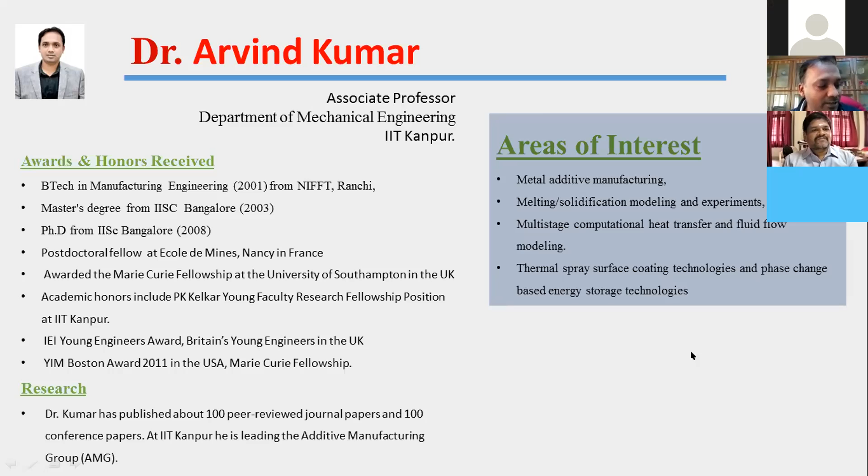So in this talk, I will look at how this 3D printing and additive manufacturing technology can enable IoT-based manufacturing. My current talk is actually based on this.

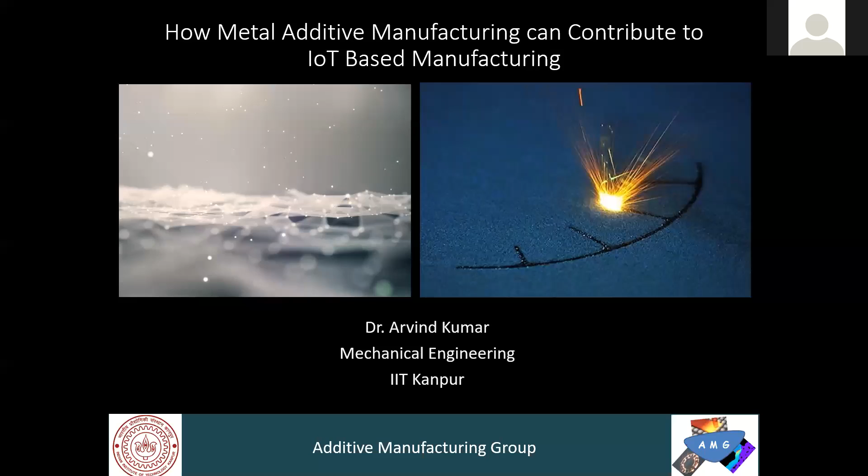So the content of today's talk, I would very briefly browse through some topics like Internet of Things, Industry 4.0, additive manufacturing, and then the major portion of the talk will cover how additive manufacturing can contribute to Industry 4.0 and IoT-based manufacturing.

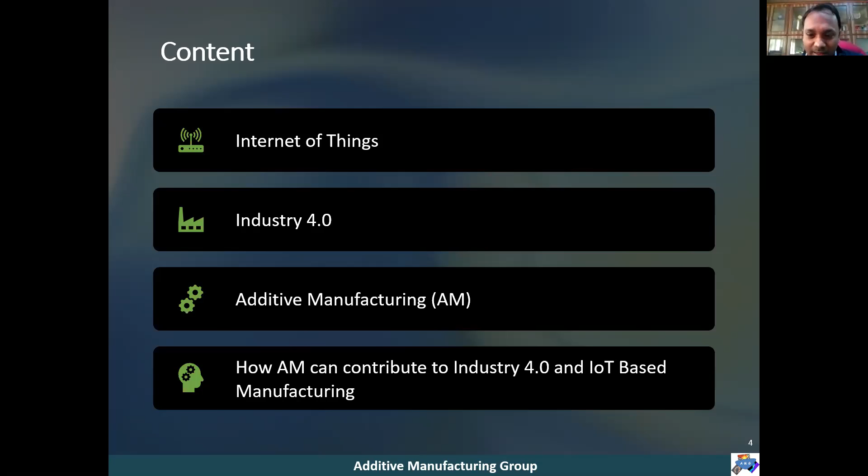I'm sure you will keep hearing the initial description throughout this course, so to tune in to the actual topic, I will also introduce you to the initial topics, but very briefly. So, Internet of Things, right?

A very classical example: these days many of us use something like Alexa or Google Assistant at home to command our virtual personal assistant to operate some jobs. Like, say, we have Alexa at home, and if our electrical switches and appliances are smartly networked, we can instruct Alexa, for example, to dim the dining room lights. After hearing that, Alexa will assist us by actually performing this job. Same way we can ask for different things: turning on the light, locking the door, switching appliances on or off, playing music, and even answering some basic questions, right?

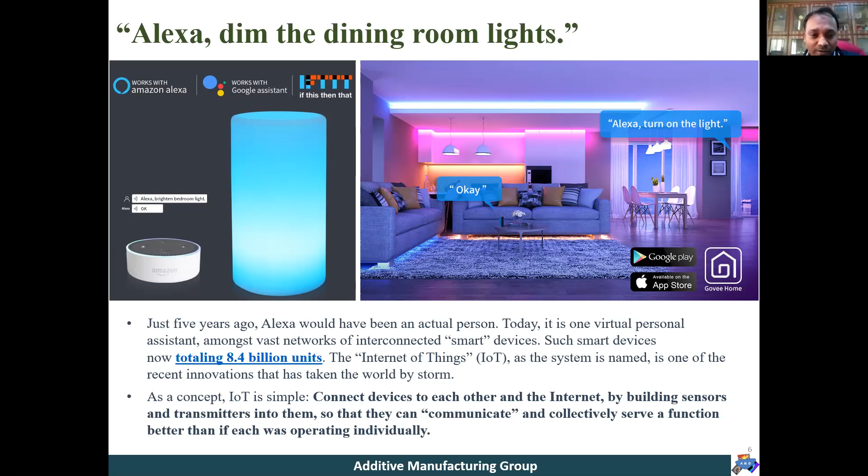Such smart devices are now in the billions in number throughout the world. The Internet of Things, called IoT, is one of the recent innovations that has taken the world by storm. How it is defined as a concept, IoT is very simple: basically, we connect devices to each other and the internet by building sensors and transmitters into them, so that they can communicate and collectively serve a function better than if each was operating individually. So this is the basic definition.

Now this is some interesting data we have, like say Internet of People, this is data from 2010. You can see various people connected through internet. We have world population of, say, 6.8 billion at that time, and the total number of connected devices were about 12 billion. It is approximately 1.8 times the world population.

Now by the year 2020, if we talk about Internet of Things, here you can see we have people connected to internet, then things connected to internet, and then things connected to things. So by now we have a population of say 7.6 billion, and now the total number of connected things, constituting all these three aspects, we have 212 billion, about 30 times the world population.

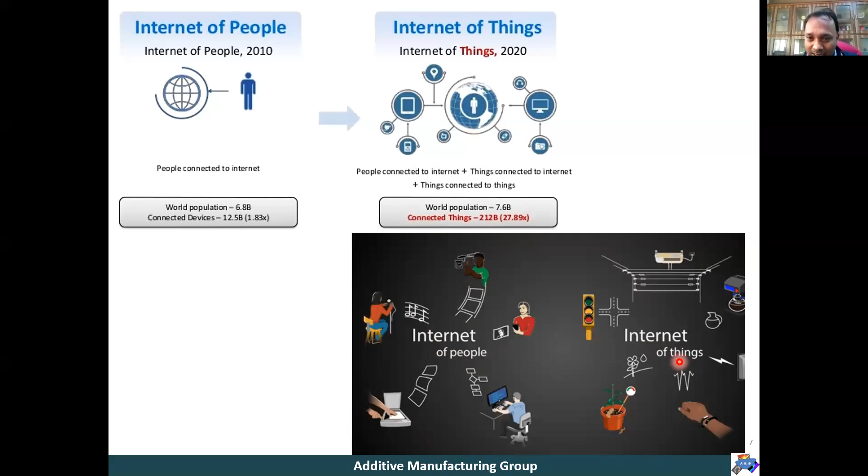So you can see internet is a wide platform where all these connections can be possible. We could have Internet of People, then Internet of Things, and slowly now, particularly for industrial application, we are evolving Industrial Internet of Things.

So we all know how Alexa kind of smart services work. We have that device at our home, and we can command the device for various actions, like say I am commanding it with 'turn on bedtime light.'

Alexa services is basically a smart home API. After that, to operate the directives based on the request, it looks at a smart home skill developer kind of system, where various skills are being registered time to time, updated, and connected to a device cloud.

So based on our command, Alexa internally assesses how to best perform that command, and then very quickly, using all these connected devices and connected commands, it operates your command very quickly, without taking much time.

And then suppose it turns on your bedroom lights. This you can do even at home or office, and both can be connected together, and this system is eventually connected to internet. So this is how a system on Internet of Things works. This very basic thing, I'm sure you all know about.

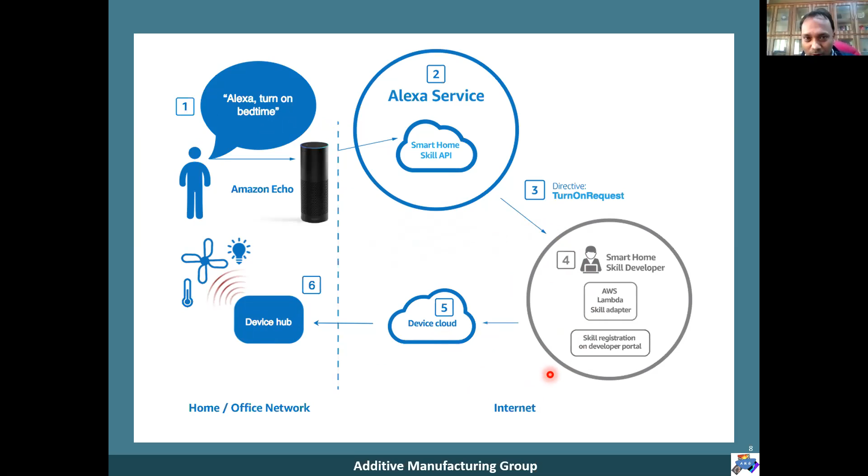After this very basic introduction, I would also briefly touch upon Industry 4.0. The background I wanted to give: Industry 1.0 started in the 1780s, and at that time it was based on mechanization, particularly steam power and weaving loom, for textile industry.

Then Industry 2.0 started just about 100 years later. It is basically innovation in assembly line and mass production system, and then electrical energy. Then Industry 3.0 started in the 1970s, and here we have basically involvement of automation, computers, and electronics.

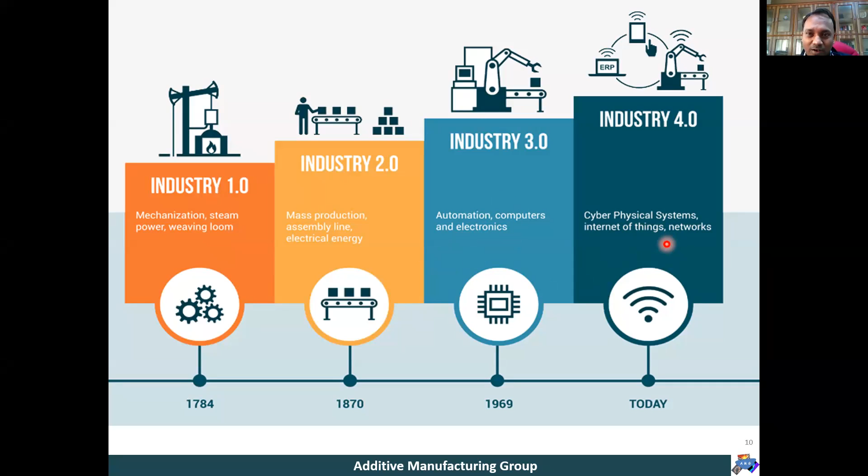And now Industry 4.0, which is today, people are saying this is based on cyber physical systems, Internet of Things, networks, and how it can drive the industrial revolution, which we typically call the fourth industrial revolution.

And if we try to combine this additive manufacturing based on Internet of Things, then we are trying to couple these two together to provide us even better results.

So Industry 4.0 is the use of a range of digital technologies to enhance the performance, output, monitoring, and control of manufacturing processes. And typically we have two aspects into this: one is a smart factory, and other is manufacturing of smart products.

And as I mentioned, in overall sense, Industry 4.0 includes various aspects like process automation, real-time process monitoring, additive manufacturing or 3D printing, and augmented reality visualization.

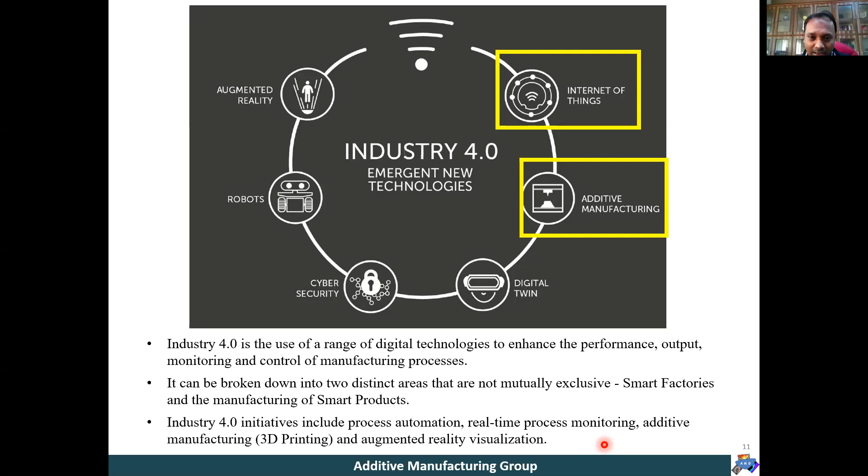Now I like to mention one thing: monitoring and control based on Internet of Things can provide us increased industrial efficiency. Recent advances in sensing and communication technology can enable us to better understand our production and manufacturing processes, and we can identify process bottlenecks beforehand, and thereby implement predictive and preventive maintenance.

Further, sensors can provide live updates on our production processes, as well as identify when tools need to be changed or require maintenance. So these are the important aspects that can be applied to any industry, and particularly to the manufacturing industry.

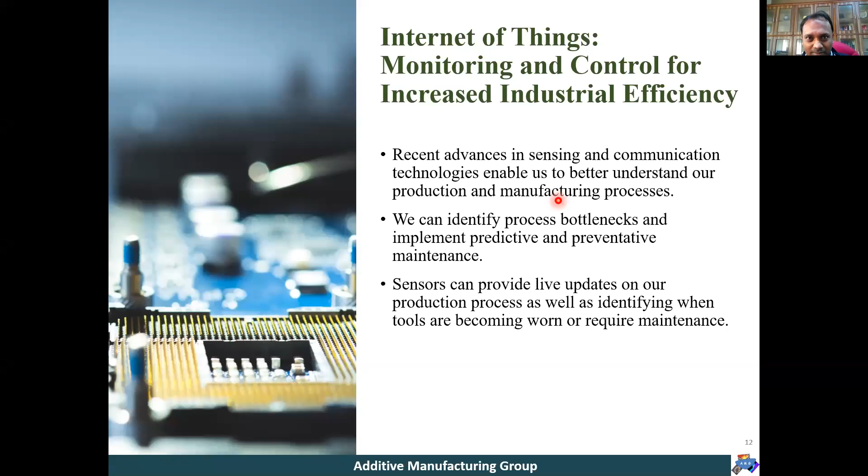So after this brief introduction about IoT and Industry 4.0, I would like to start with additive manufacturing. The idea is to understand how it can contribute to Industry 4.0. I will introduce you to the basic introduction of additive manufacturing, then its benefits and industrial application, challenges and future pathway, and then we could see in detail how additive manufacturing can be an important contributor for Industry 4.0.

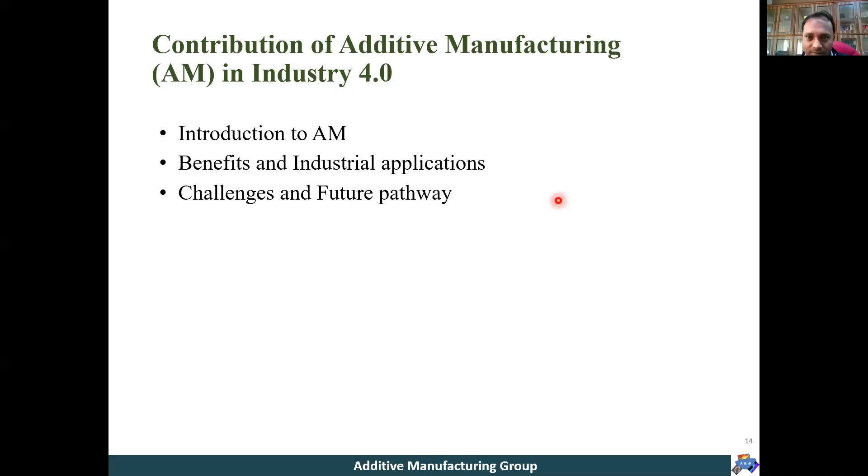So if we see what is additive manufacturing, here one picture is shown where eventually we want to make some 3D objects. So we start with 3D CAD model of that part. Then using design tools, we convert that model to machine identifiable language, STL file, and slice the layers and generate the tool path.

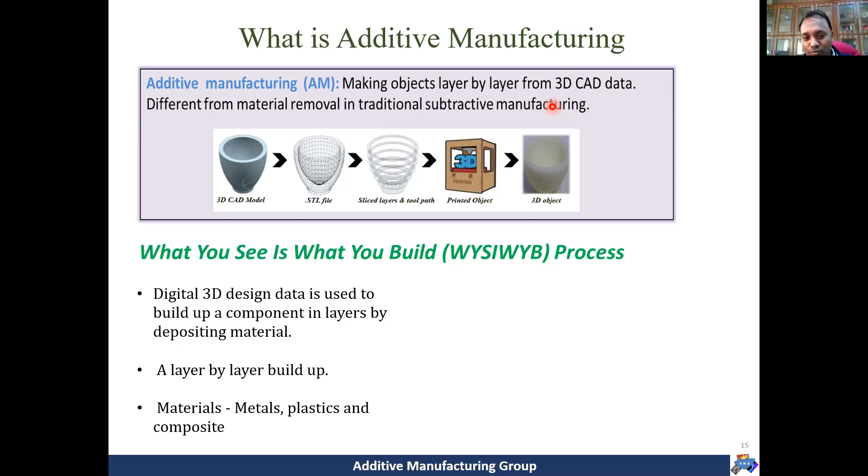Then this information, these commands, are fed to the 3D printing machine, and based on the given command, it prints your object in layer by layer manner, and finally the entire shape is obtained. So if we define it, the aim is making objects layer by layer from 3D CAD data, which is different from material removal in traditional subtractive manufacturing, because here we are adding material instead of subtracting it. Typically, additive manufacturing is identified as a 'what you see is what you build' process, following a bottom-up approach where layer by layer build of the entire component is obtained. This additive manufacturing can produce parts of different materials, including metals, plastics, composites, and even ceramics.

This slide shows you a basic difference between additive and subtractive manufacturing. We all understand that in subtractive manufacturing, we start with a given block of material, then using one or several subtractive manufacturing processes or their combination, we finally manufacture our desired object. While doing that, we witness a lot of material wastage as well.

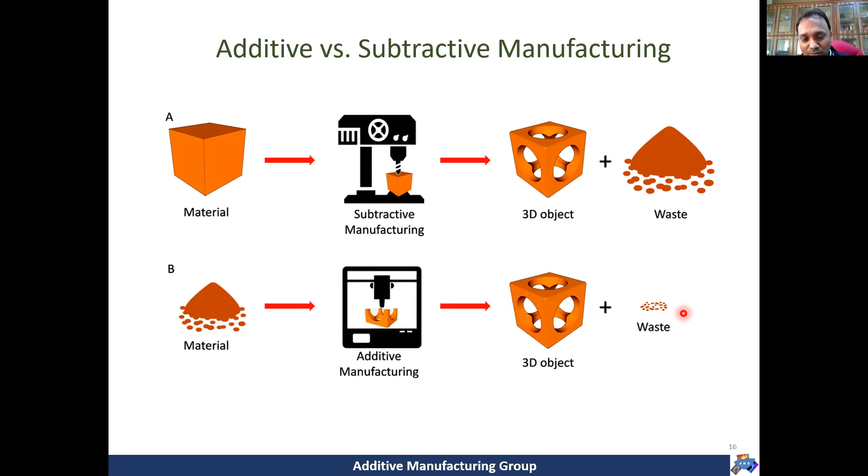On the other hand, in additive manufacturing, we start with material in the form of powders or some kind of feedstock, and using a single piece of equipment, which we call a 3D printer or additive manufacturing equipment, based on the given design data, we prepare the given shape in layer-wise manner from bottom-up approach. This way, the final wastage of material is very little. So not only can the wastage of material be minimized, but also the number of equipment requirements can be minimized. Both of these serve as a reduction of energy and reduction of resources, and that's why additive manufacturing is very much based on the concept of green manufacturing.

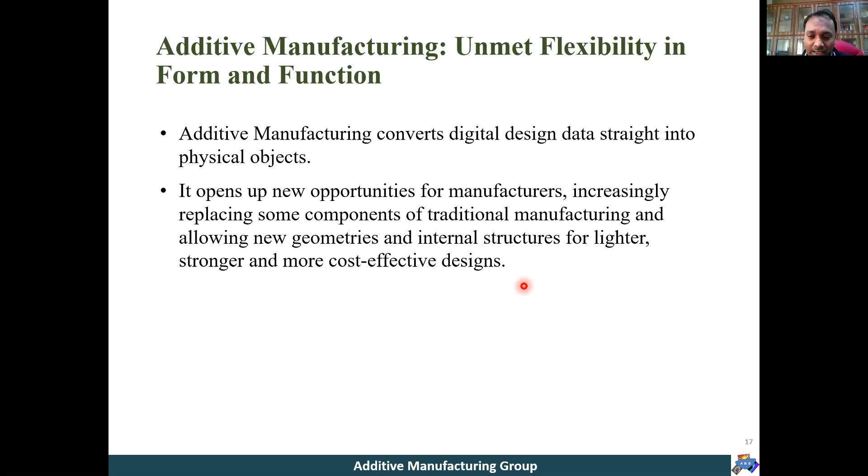Regarding additive manufacturing, it is said that it provides tremendous unmet flexibility in form and function. We learned that the additive manufacturing process converts digital design data straight into physical objects, and at the same time it opens up new opportunities for manufacturers, increasingly replacing some components of traditional manufacturing and allowing new geometry and internal structure for lighter, stronger, and more cost-effective designs. We'll see these very soon.

Throughout the world, there is significant increase in market for additive manufactured parts. This is a projection and past history for 3D printed parts in US$ millions. Right after 2015, there is a rapid growth in market share, and by 2025 it is projected to cross even 8,000 million US dollars, which is significant for 3D printed parts. There is worldwide focus on additive manufacturing, and in India also we are focusing on that, and we need to match the speed with which the other part of world is progressing in this area. This will help us to indigenously produce AM components, innovate process design development, develop capability to process various materials, and eventually it will impact our Indian industries.

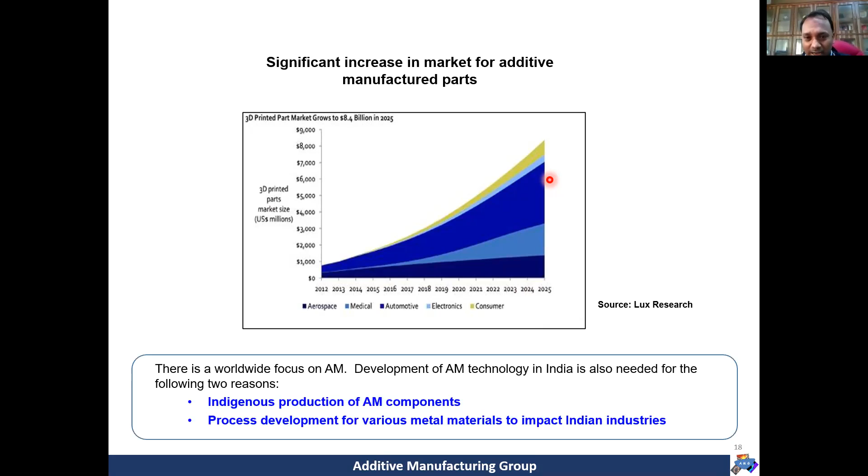So we must now understand what is the main reason this additive manufacturing technology is growing so rapidly. We must understand its benefits.

So you see, this way, it can provide a single piece, particularly in serial production, a part very quickly. And that way it reduces or shortens the time to market to launch, and that way inventory reduction could be significantly achieved.

Since it is based on 3D CAD data and utilization of a 3D printing machine, we could perform prototyping and testing right at the concept stage, and that way we can come up with several potential designs and quickly print those designs and check the prototype printed and then finalize the design. So this way it is a kind of very rapid conversion of your design and prototypes to a final part.

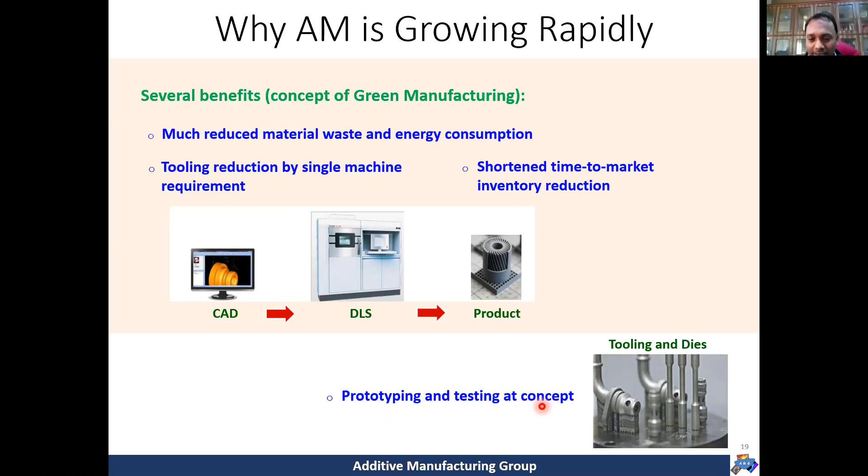Then because of the material addition kind of process in this technology, complex shape is not an issue. We can manufacture any complex shape, and this is the most important contribution. Not only that, we could manufacture lattice structures, and by doing that, and even by doing topology optimization, we could achieve significant light weighing in the component without sacrificing on the performance.

Here an example is shown like the complex heat exchanger. It is manufactured as a single piece using this process. Then some hydraulic component with complex internal geometry was manufactured as a single piece. Then some tools with conformal cooling channels were manufactured.

Then using design innovation and topology optimization, we could achieve significant weight reduction. One classical example cited is a bracket used in aircraft. The original old design was 2 kgs, but with additive manufacturing and topology optimization, we could manufacture the same part with 300 grams, and there is no compromise with performance.

So this process basically gives us freedom of design, which eventually leads to manufacturing for design concept. So you design anything and it will be manufactured. This is the idea. You can see some of the examples here.

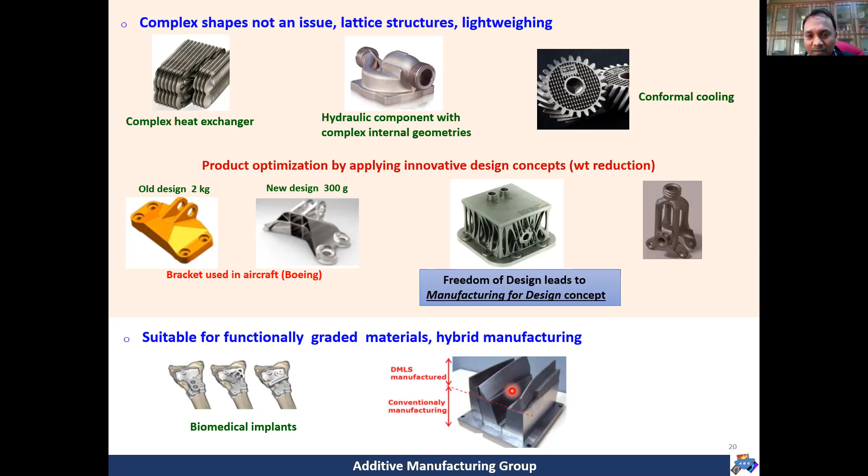Then there are many applications where we need graded structures or graded properties. So in such kind of requirement, whether it is biomedical implants or hybrid manufacturing, these are very important contributions, because only additive manufacturing can potentially do that. Using conventional manufacturing, it is just next to impossible.

So after this slide, I would like to mention a few things. People always ask whether we should completely replace conventional manufacturing with additive manufacturing, or better, what are the opportunities where I can potentially use AM instead of conventional manufacturing.

So these are some guidelines where if you use additive manufacturing in place of conventional, it will provide you benefits. Like say, when we require improved functionality in terms of light weighing, conformal cooling channels in some tools, or material reduction, then we should definitely go for additive manufacturing.

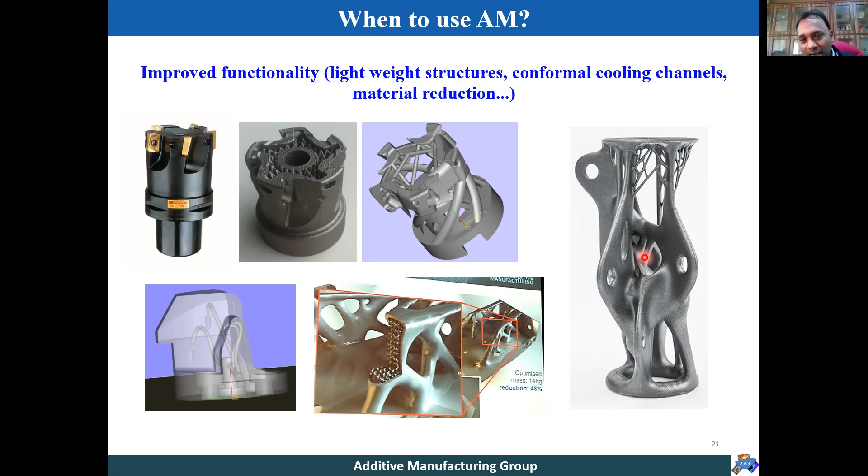And here you can see some engineering parts shown, complex shapes, parts having lattice structure for light weighing, as well as sandwich kind of structure. You can see some parts with conformal cooling channels, complex parts for significant weight reduction. Such things as a single piece, only additive manufacturing process can provide. Conventional manufacturing is just not possible. So in such kind of applications, we should definitely go for additive.

The next opportunity or guideline is that when we see a very complex part whose manufacturing using conventional methods is very costly, then we should utilize additive, which will provide us significant economy. For example, complex structures shown here are just very expensive and time consuming to manufacture by conventional manufacturing. In this scenario, additive can definitely provide significant benefit, so here we can again go for additive.

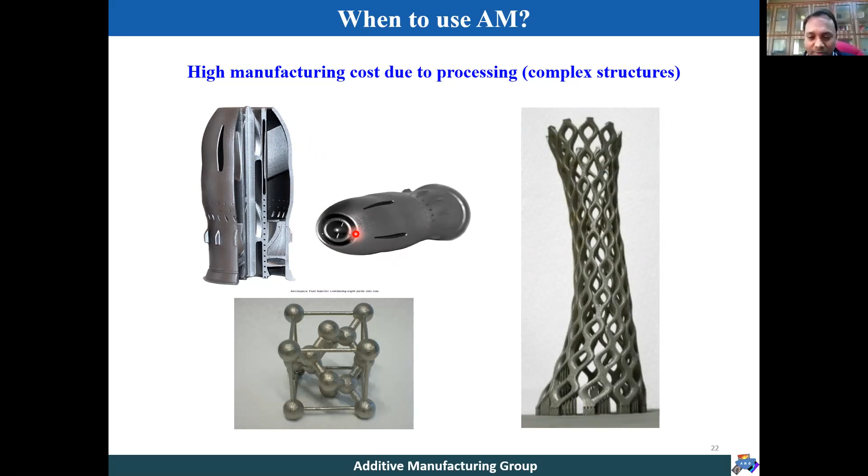Then if we want to save assembly cost, some complex parts using conventional manufacturing require assembly or welding or joining of several small sub parts. So in that case, it takes time and increases cost also, and many times it is just not possible by conventional means to manufacture such parts. So in those kind of scenarios, additive can definitely come into picture, and it will provide significant reduction in assembly cost. Some parts you can see here, a fuel nozzle and some complex parts.

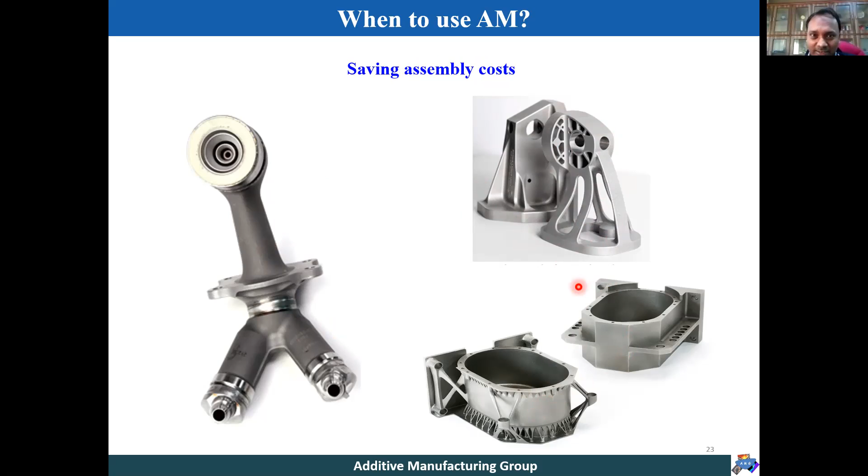So you can very clearly see from these slides. Then the fourth opportunity is when we want to aim for material saving in case of expensive material like superalloys or other kinds of expensive material. So using a lattice kind of structure, we could save the material without compromising on the performance. Here an example is shown of some kind of lattice structure being built into the bulk material. Then lattice structure density was decreased from 24 to 4% without sacrificing the material performance. Then some bulk part and sandwich kind of structure with lattice structure.

Here you can see an engine manifold, using a lattice structure built in between. Significant weight reduction is possible, as well as material saving.

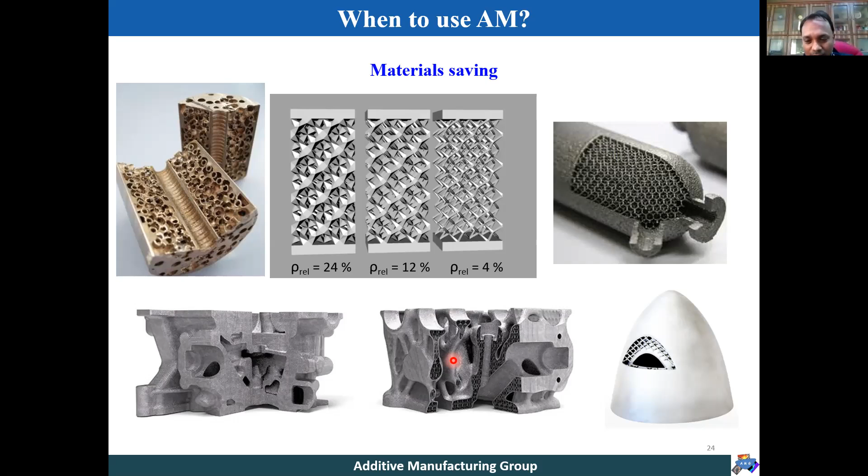So this is another potential guideline where additive can definitely provide much better flexibility and opportunity. As this topic is based on metal additive manufacturing, I'm not going to talk about additive manufacturing of other materials like polymers, ceramics, composites. I will directly come into the metals part.

For metal additive manufacturing, there are basically two technologies. One is based on powder bed fusion, where we start with metal powder, and using a heat source like laser or electron beam, we selectively melt the powder particles in the powder bed and allow it to re-solidify to provide a consolidated track. Layer after layer buildup is followed in the vertical direction, and finally a final shape is obtained. An example is shown here: metal powders and their SEM image, and using the machine we get this complex part built up in a layer-wise manner.

The other technology is based on powder delivery, where the powders are not spread in the form of a powder bed, but are simultaneously fed from a coaxial nozzle from where the laser is also fed. This technology is known as directed energy deposition, DED. So these are the two main technologies available at the moment for metal additive manufacturing.

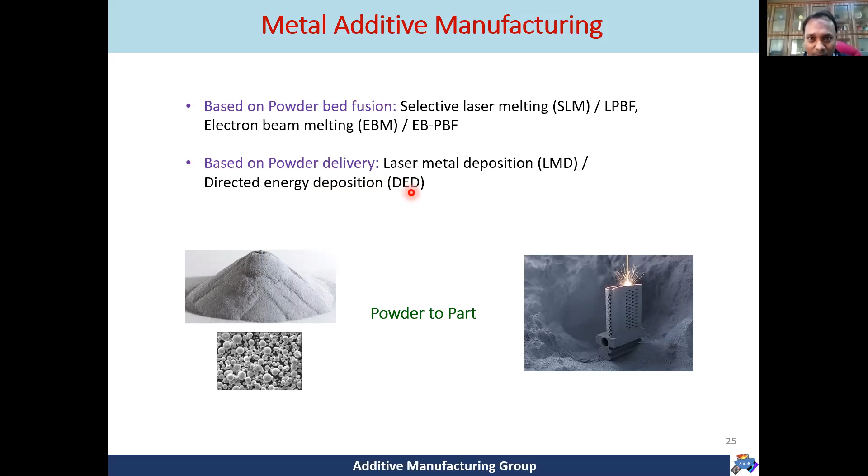In this powder bed fusion technology, as we can see, we have a powder bed and we selectively melt the powder bed using some thermal energy source. The thermal energy source could be a laser beam, in which case the process is selective laser melting or laser powder bed fusion. The other source could be an electron beam, in which case it is electron beam melting or electron beam powder bed fusion process.

A schematic is shown here. You have a given powder bed or powder layer, and you apply your laser selectively according to the tool path design. Wherever it crosses the powder bed, it creates a melt pool, and that melt pool solidifies to give you a solidified track. Once one layer is created, you do the same process for the second layer, third layer, fourth layer, and likewise you finally get your final product.

Typically these layers are something about 50 microns in height. So suppose you want to get a 100 millimeter height of the object, you can easily find out 100 millimeter divided by 50 micron - that many number of layers would be required to get your final object.

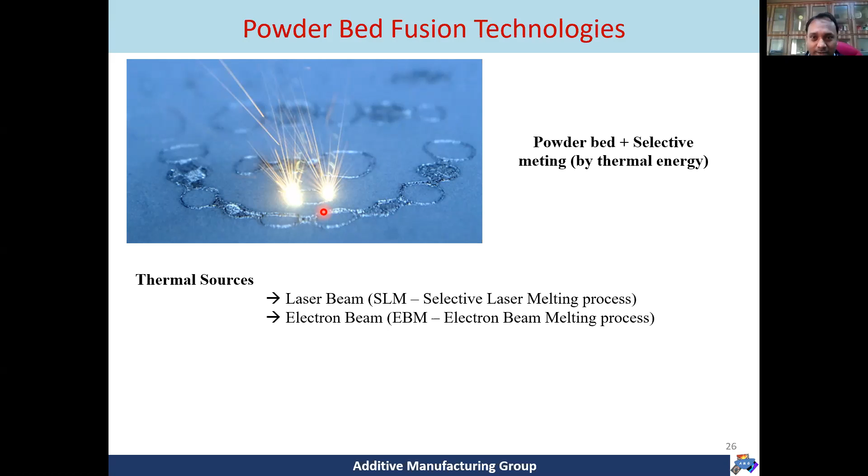So this is the basic thing. I'd like to show you one animation after this. Locally, if we see, when the laser is operating on a powder bed, we obtain a melt pool, and the laser is traversing from left to right. This left side is already a solidified layer, this is the local melt pool where the laser is falling, and then the laser travels toward the right side, interacting with the remaining loose powder. This way we convert the loose powder in the powder bed to a melt pool, and then the melt pool to a solidified layer. This is how we get the joint, kind of like welding - the part density produced by this process and its strength is as good as a welded joint.

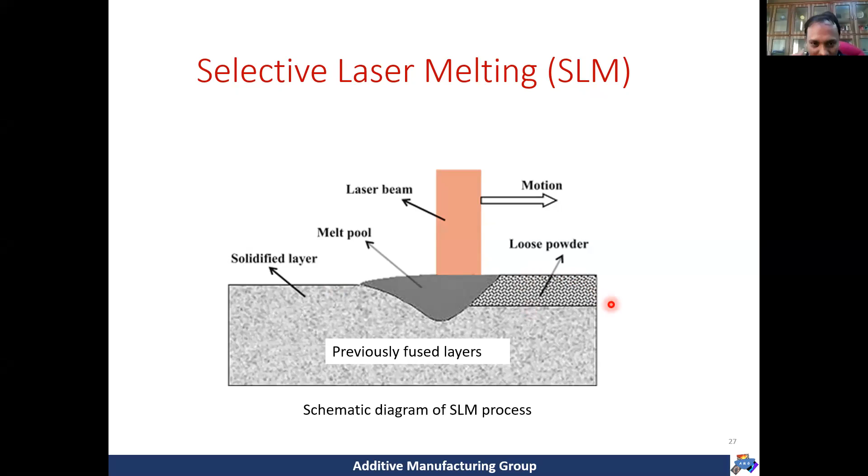So let us see this animation. This will show you the process of how this metal additive manufacturing process works.

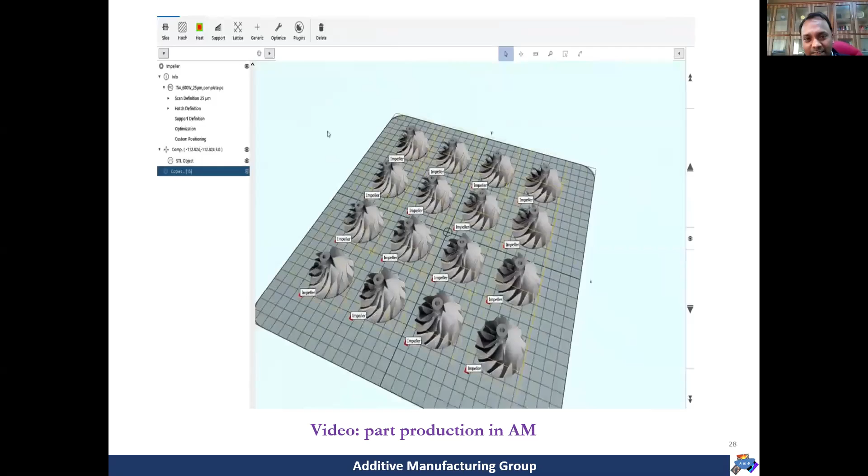So this is the CAD model development of an engineering part - it is an impeller in this case. In a single build, several such impellers can be produced, so that advantage is being taken.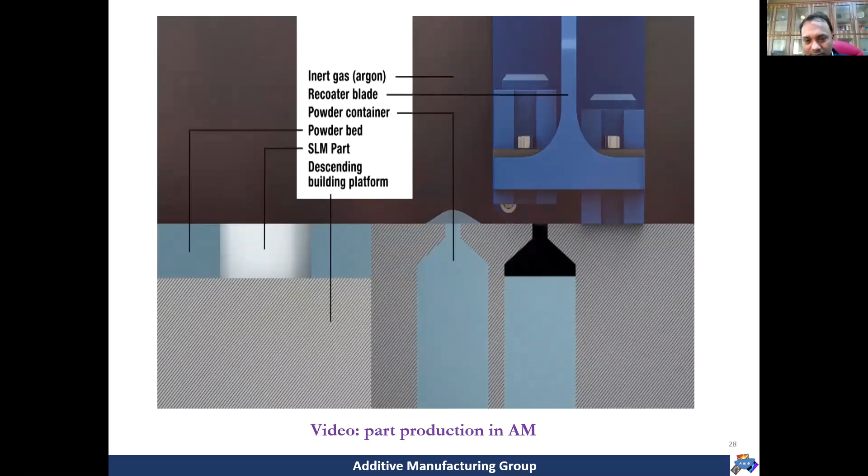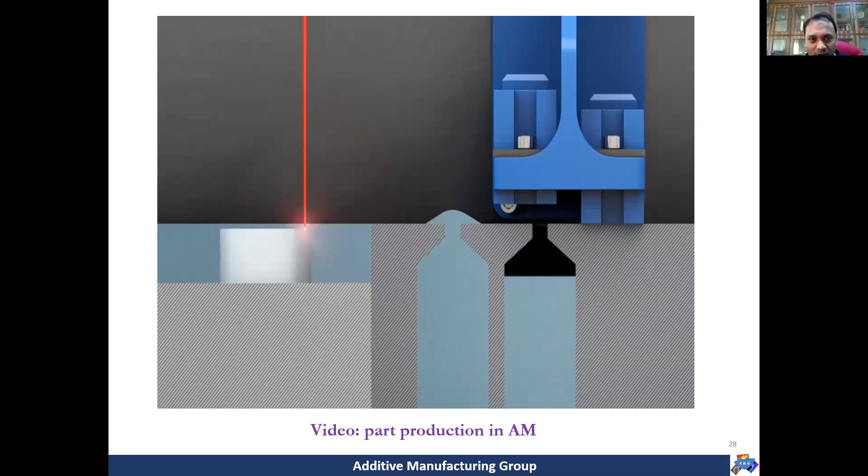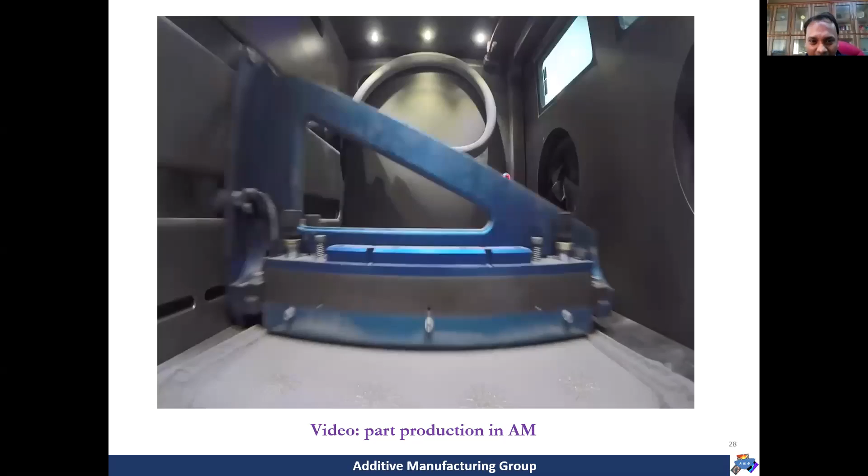They are setting up the machine parameters, then the machine is started. So the first layer of all 12 impellers is being created. Laser is falling on the powder layer - see the process here. After creating the powder bed, the laser will operate on this powder bed according to the tool path. This way, layer after layer is being created, and you will see that finally your final printed object is ready.

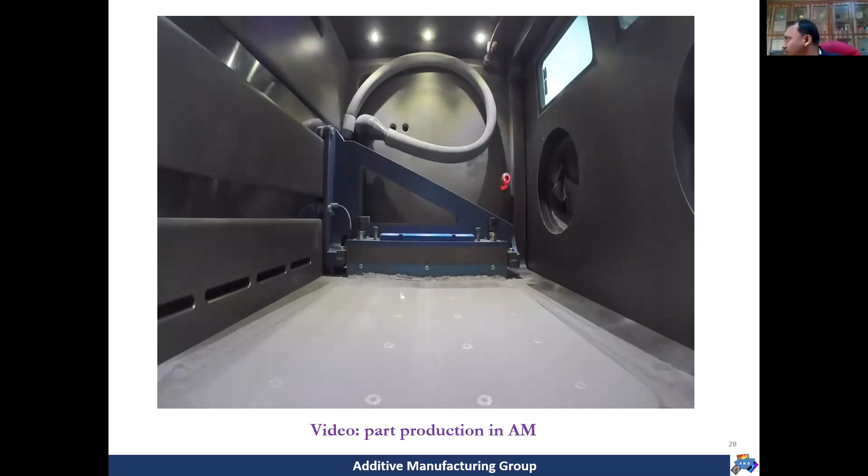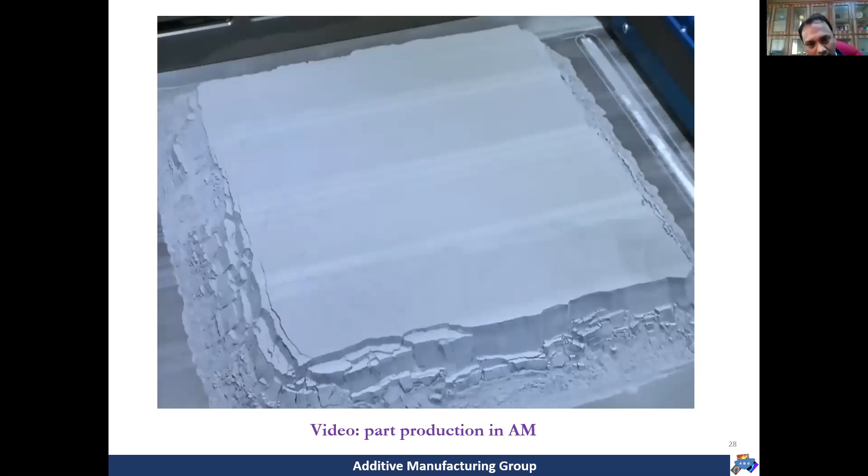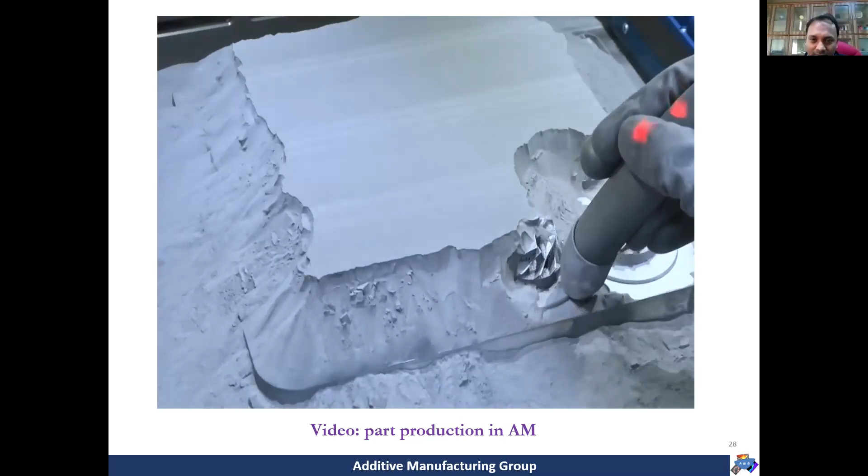So the parts were printed and they are now being removed. After this, some post-finishing operations will be done to remove the support structure and provide surface finish, and then your parts are ready to use.

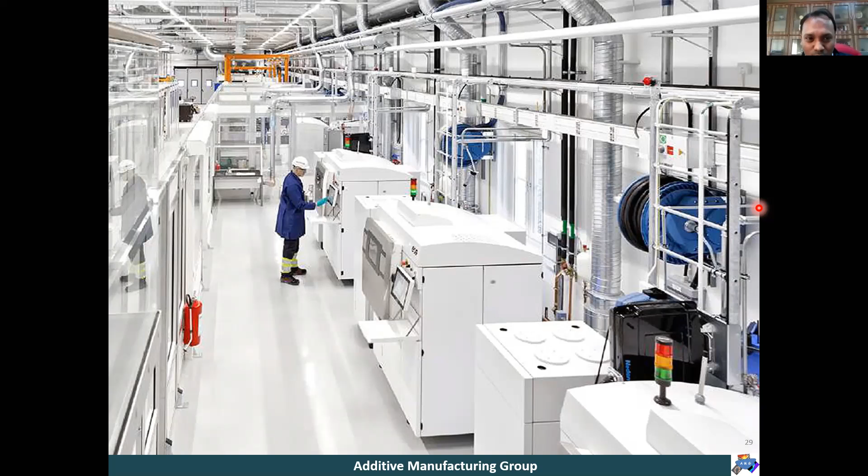So in an industrial site, there are several such machines put together, for example, for processing different sizes or different material kind of requirements. All these machines are connected through a CAD design center, where information is fed to these machines centrally, and according to your need, these machines can operate and provide you your additive manufactured part. More examples of such machines installed in an industrial site.

The smart factories represent a new generation of the production system in the concept of Industry 4.0, and it supports advanced technology such as additive manufacturing, cyber physical systems, big data, Internet of Things, and cloud computing.

IoT here provides information from all physical objects through a wireless or network connection. And CPS, cyber physical system, shares information regarding all machines, utilities, and storage systems, and controls them autonomously. So in this way, CPS technology helps us to effectively improve the manufacturing process in the concept of smart manufacturing.

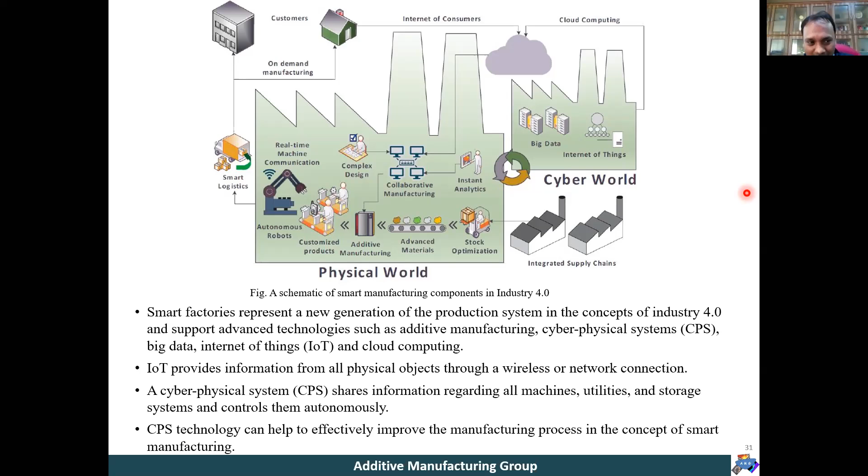Once you manufacture such a thing, it is ready to deliver to the customer. So this involves several aspects, and a good synergetic approach is required.

So from here we saw something like a concept of cloud manufacturing. This refers to processes that are highly service oriented and can be modified online. This technology gives the opportunity to integrate many machines in a factory and control them online. The outcome of this combination is that a user-specific product can be produced within each machine.

Let us understand this by an example. Suppose a customer orders a given geometry to be purchased. After accessing the design tools provided by a factory, they can change the materials, colors, and other aesthetic features of their desired product. At the same time, they can check the availability of materials, machines, and transportation system, so that they can assess how much time it will take to get the final product delivered to their doorstep.

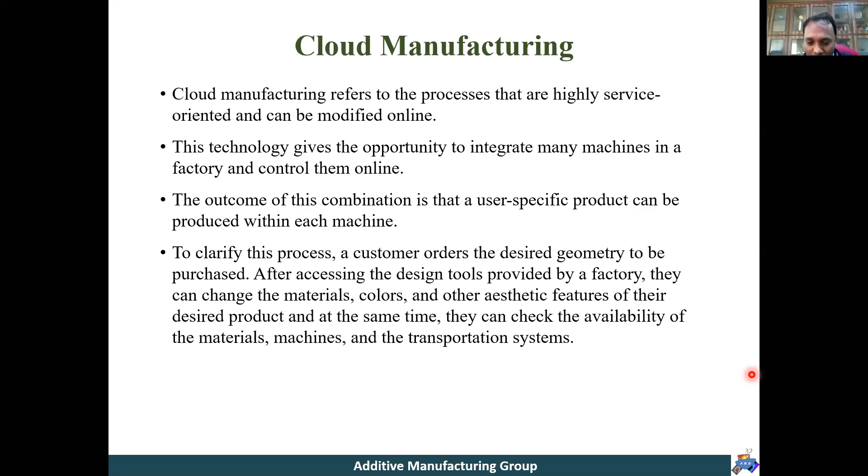So these are something like on-demand driven kind of requirements.

In more detail, I would like to show you a flowchart of cloud manufacturing and various involved activities. For example, the first thing when you get an order, you start with scheduling, design, and resource description. Then you think about whether you want to use rapid technology, like rapid tooling, rapid manufacturing, rapid prototyping, or some other technology, whether additive or some combination of several manufacturing processes. Once that is decided, you need to think about data analytics for choice of optimized parameters and even optimized design.

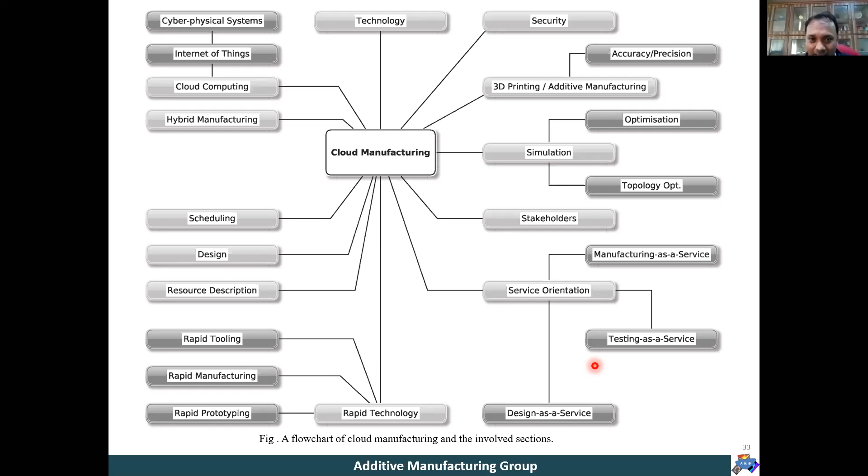On the other hand, your stakeholders or customers are there to choose their final material, final size, aesthetic design, final delivery time, and all those things can be actually decided. So this is how this integrated cloud manufacturing works.

And if I want to show the architecture of the CAMP system, which is a cloud-based additive manufacturing platform, you can see this here. We have a service requester, then a platform provider, which deals with services and description, and at the back end deals with machine, material, sensors, software, data, and know-how. So this is your service provider.

So there are three major stakeholders in the cloud: one is service provider, one is service requester, and the third is platform provider. And all these three need to integrate properly. This is the very basic design concept of CAMP.

Service providers connect their printers and other printing resources to the cloud and upload resource capability and know-how. The service requester explores the options they have and finds the most suitable solution for their task and makes orders. The platform provider provides cloud computing and storage facility and constructs the platform to serve as an online marketplace.

So I think you can understand this very well. This Internet of Things, for example, is now working. For example, say we have Amazon or Flipkart, right? So they are service providers basically. The similar concept is brought for this CAMP as well.

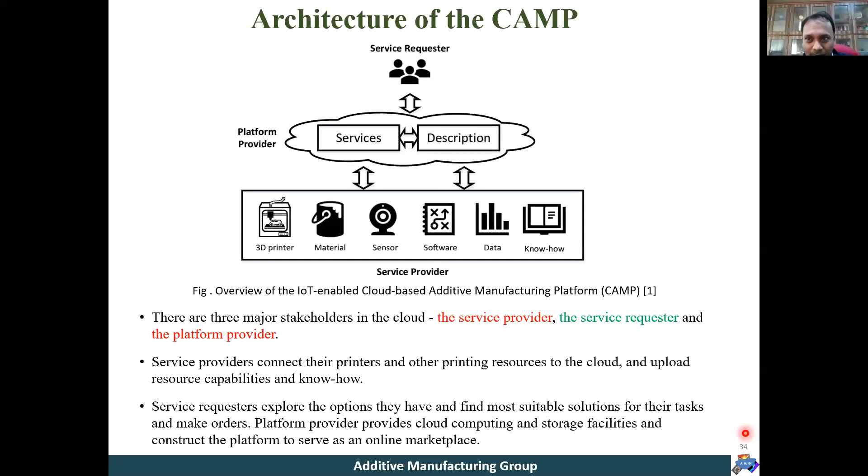So let us see now how the information flows in additive manufacturing processes, basically for cloud-based 3D printing services. Let us see first the basic information shown at the bottom. We have a user, then based on cloud availability and all, we could select the part and corresponding CAD file. Then this information is sent to the operator, who will operate the machine and appropriately select the optimized parameters and finally provide you the printed part.

In more detailed manner, let us see the first thing. First is process planning and second is design, and in between, based on the know-how, these two are well connected. Requirements are like what process, what material, what printing parameters. Then on the design side, it's 3D model and machine identifiable tool path generation. So these two finally, after our know-how, will finalize and set the G code, slice the contour data to the printer, and it will print the part. So this is very simple to understand, right?

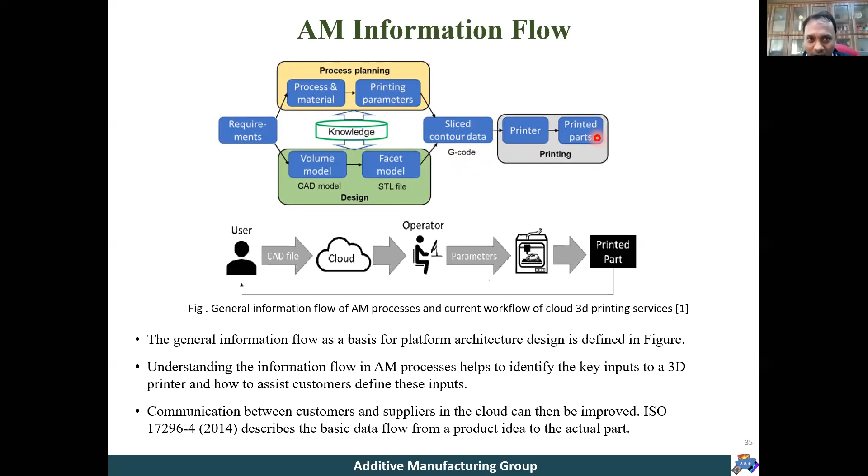So I think I don't have to focus much on this. This is something like a very clear set of steps followed for how the information can flow in such cloud-based additive manufacturing.

So if we just want to highlight the advantage of IoT-based additive manufacturing, we can see from our previous discussion it provides tremendous creativity. It allows design of products with fewer and more complex parts possible. It preserves energy by obviating production processes, decreases wastage, and enables faster deployment of Industry 4.0. And of course, we have the opportunity to reduce weight and topologically optimize the part, and all the opportunities we already saw in the case of additive manufacturing.

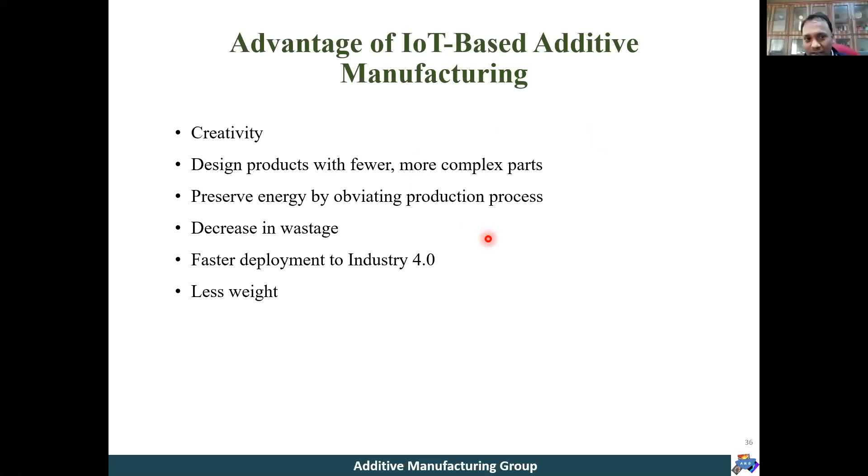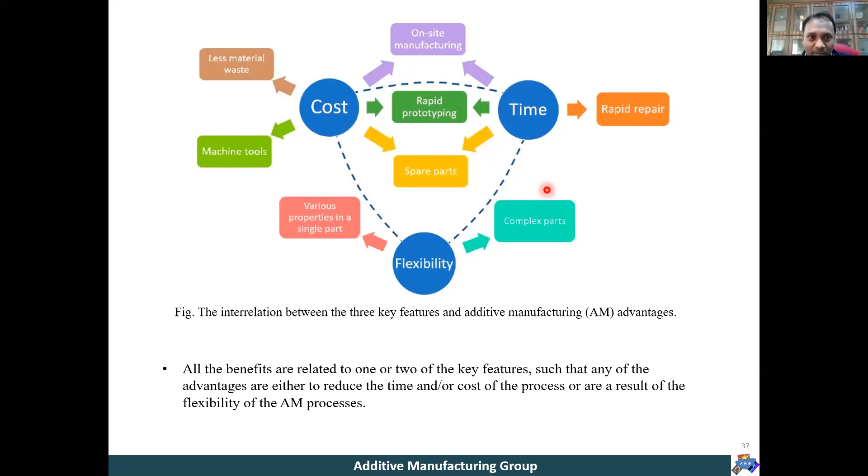Then one very important aspect comes into picture: whether this additive manufacturing is sustainable or not. So of course, to assess its sustainability, we need to evaluate this process under various aspects. We know that reduction in energy and material consumption, transportation, packaging system, and different life cycle analysis methods have been performed on additive manufacturing processes in order to make them more sustainable regarding their economic, environmental, and societal impact. There are different attributes under economic aspects, environmental aspects, and societal impact aspects.

Those are being evaluated, as well as being tested for new parts. For example, on the economy side, the market evolution of a given part, its application, its supply chain, then production cost, machinery cost, and process productivity all need to be evaluated.

On the environment side, we need to evaluate resource consumption regarding materials demand, process life cycle energy, waste management, and pollution control. On the societal benefit side, we need to see labor development, product quality, public acceptance, healthcare improvement, and ethics, and all those things. So in most of these attributes, additive manufacturing assessment is coming out positive, and that makes it a sustainable process.

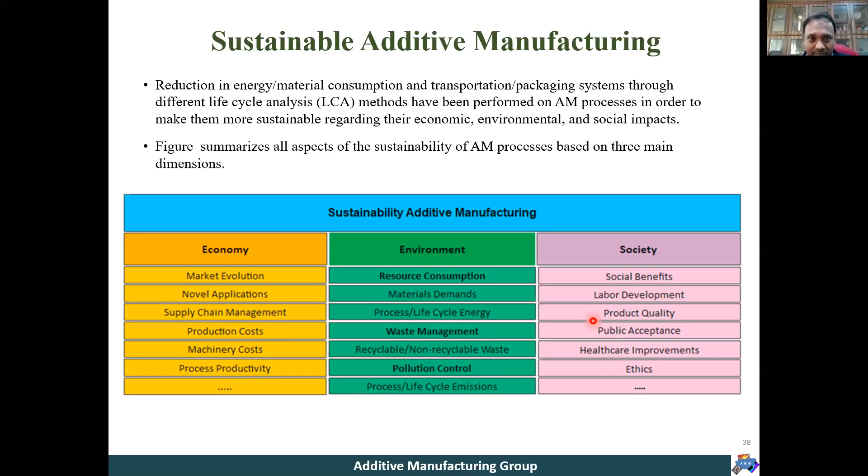Because of that, there are several benefits attached to additive manufacturing which are sustainable. We already saw that AM introduces numerous significant changes in product design, materials processing, manufacturing process, and supply chain management. Compared to traditional production such as machining, forging, finishing, casting, etc., additive provides a great opportunity in sustainable production.

Some of the advantages I like to list here: less raw material required in the supply chain process, higher resource efficiency in manufacturing processes, reduced consumption of waste material and pollution in the manufacturing process because it uses a single piece of equipment, higher efficiency and flexibility in product design, lower number of transportation processes, and reduced carbon footprint.

A single piece of machine can do all the jobs for you. It is decentralized and close to consumer manufacturing, with shorter supply chains and more localized production using innovative distribution methods and collaboration. There is also extended product life through novel technical methods such as remanufacturing, reusing, repairing, refurbishing, and sustainable socio-economic production. All these advantages make additive manufacturing quite sustainable.

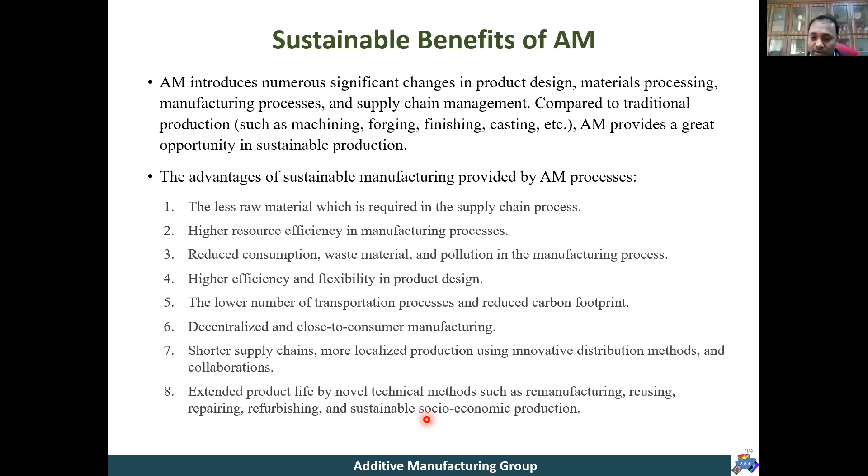If we see the cost versus production speed forecast, for example in 2013 and now up to 2023, after 10 years, we could clearly see that the cost is becoming 50% cheaper, and at the same time the productivity has improved 400%. So the limitation people cite, that additive manufacturing is slow compared to mass production systems,

in that regard improvements are coming up. The other issue is that it is an expensive affair, but there too the cost is coming down with time, due to ongoing research activities and, as I mentioned, utilization of IoT and cloud-based manufacturing into additive manufacturing systems. That is also contributing to reduction in cost and increase in productivity.

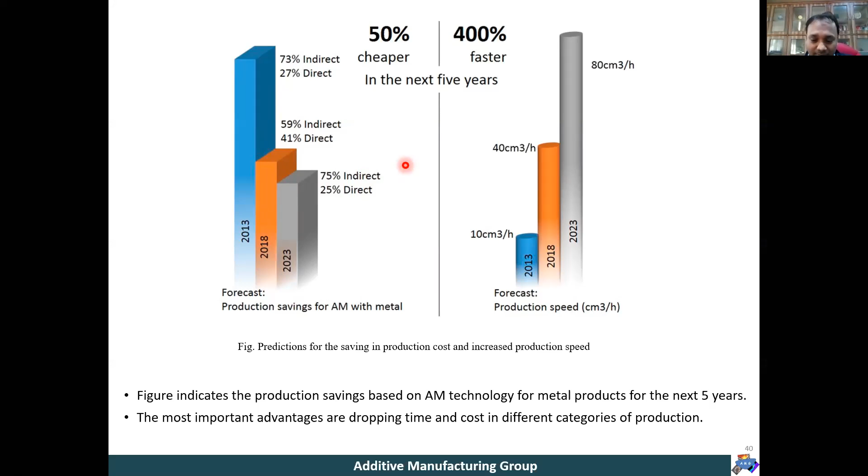After looking at this, I'd like to point out some potential applications of additive manufacturing, particularly focusing on metals, not polymers and other ceramics. When this additive manufacturing technology came into industrial prospect around 2014, the forecast was that we only knew about one-third or less of its utilization. The remaining was still in the iceberg, immersed in the ocean.

Six years down from 2014, we could see that many of those submerged applications already came up to the surface. Earlier it was applications only for models and prototype development, some pattern development, and plastic aircraft parts. But nowadays we see additive manufacturing applications in medical implants, molding industry, custom prosthetics, aircraft industry, electronics industry, integrated electronic circuits, automotive industry, and more. There are many unimaginable applications still to be explored, so this field is heading towards a very bright prospect. There is no doubt about that.

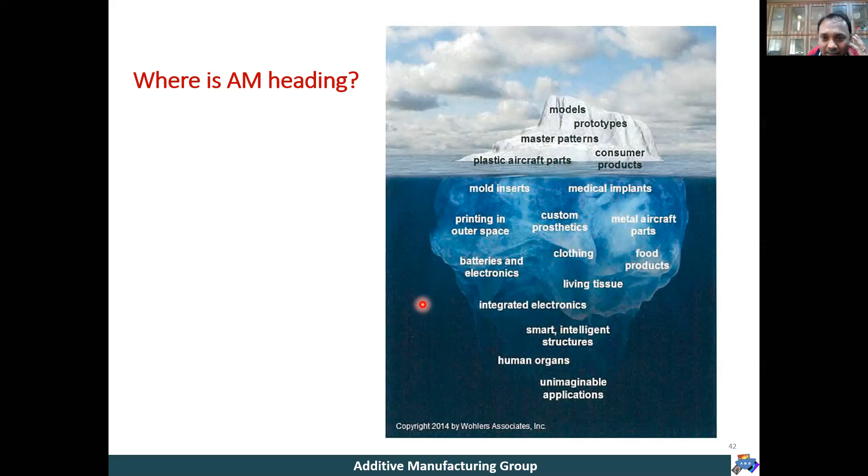If we look at the metals part currently, we could see from this slide several potential industrial applications starting from aerospace, automotive, tooling industry, hydraulic industry, repair industry, biomedical industry, where metal additive manufacturing can play a very significant role. You can see different industrial applications and some typical parts, photographs of parts already being made. There are tons of such applications.

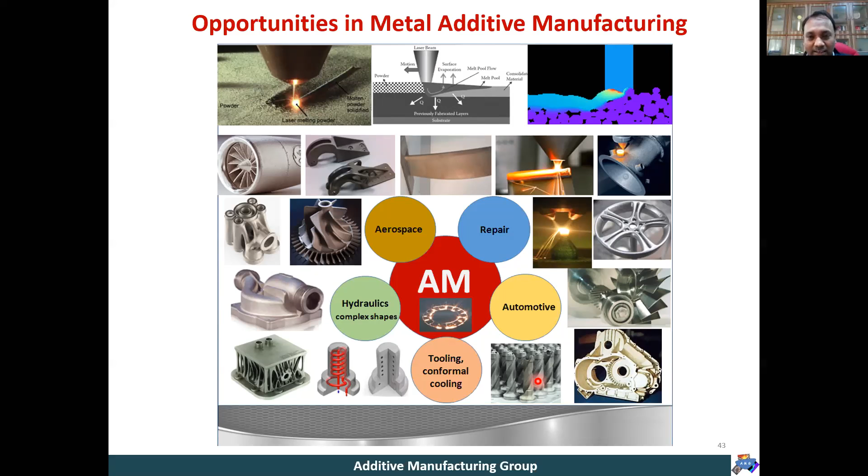There is now wide acceptance that additive manufacturing can be a very important contributor to Industry 4.0, and people are working towards making it more IoT-enabled and cloud-enabled manufacturing systems. It is very nice to see all these good things about additive manufacturing, but we should also identify and recognize the typical challenges and limitations.

For example, there are imperfections when we create layer-wise build-up, such as voids and porosity between the layers, which deteriorate the interlayer bonding strength. This way the mechanical performance of such parts becomes poor. So this is one important aspect - how to address these defect formations so they can be minimized. A lot of research on physical understanding of the process is required, and this is significant ongoing research throughout the world on how to minimize defects.

Then the second aspect is cost. Right now, as I mentioned, the equipment is expensive. At the same time, the material like powder materials are also expensive.

As I also said, with time and more research into these aspects, the cost of machines as well as cost of powders and overall cost of the part is coming down. So in 3 to 5 years, we will see that its cost is further reduced.

Then production time. It is being said that additive process can be better suited for serial production or small batch production, but for mass production it is not really suitable. I agree to that, but with more research into build platform and building time, this can also be addressed so that at least an acceptable batch production size could be achieved.

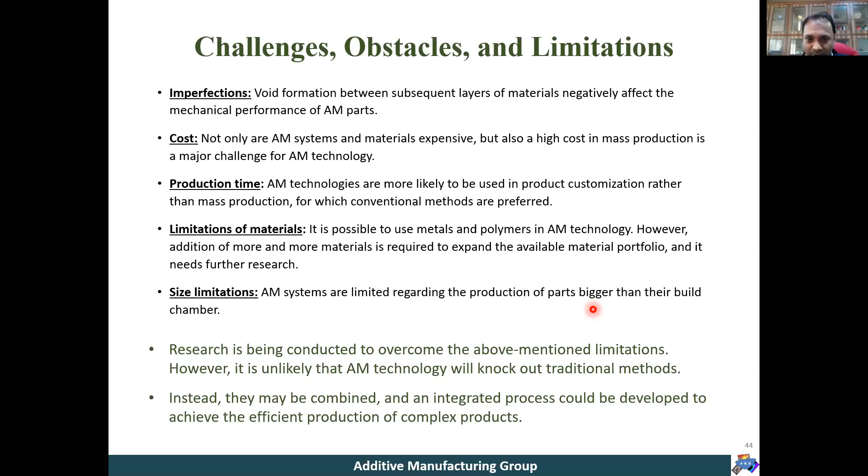So in this regard, I can now broadly highlight various research opportunities. There are huge research opportunities in various aspects.

For example, one research can be on minimization of defects and understanding the microstructure of additive parts. Then improvement in build rate or productivity, then stresses and how to minimize those, then improvement of surface finish, then manufacture of complex parts and lattice structures, new and novel materials development, then manufacturing with multi materials, and manufacturing of functionally graded structures.

Then on the design side, there is huge scope on part design, CAD side, tool path generation, and on application-oriented research there are huge applications. You can choose any industrial application and try to explore what are the potential parts which can be additively made, and whether there is economy in producing that part with additive process or not.

Apart from this, there is huge scope on IoT and cloud-based systems development itself, where not only the role of a mechanical engineer or materials engineer comes into picture, but the role of someone like a computer engineer and systems engineer is required. So that side also there is huge scope.

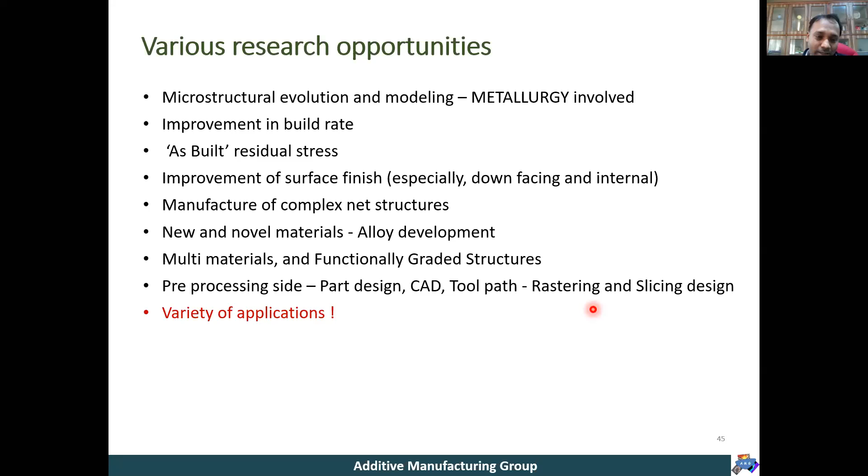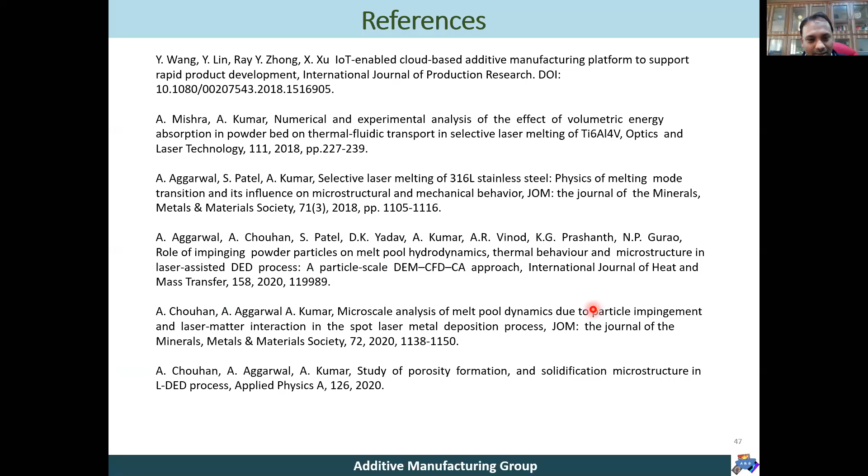So some references I like to mention. These were the references, and acknowledgement to our project funders, DST, Imprint, and ISRO. And with this I end my talk. Thank you for your attention, and I can take up questions and discussion now. Thank you very much.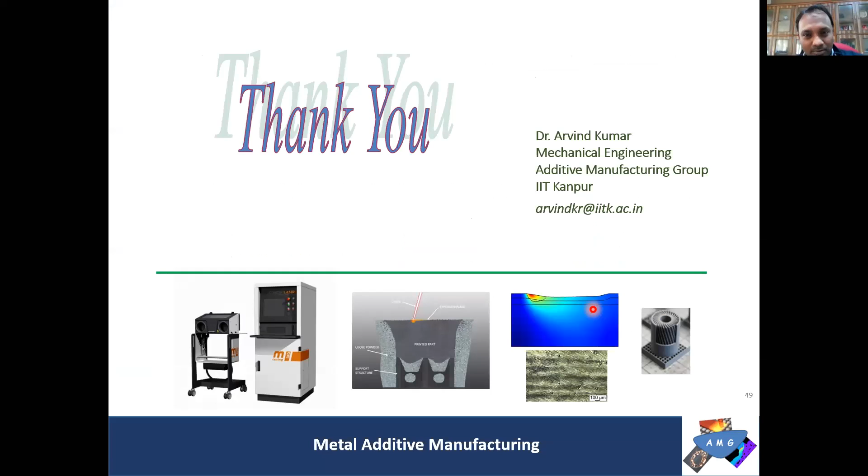Thank you, sir. Any questions from the participants? Any questions? I think no questions from the participants. If they have some questions later on, I can reply by email. If you can combine all questions and send them to me, I can reply over email. Sure, sir.

So is there anything else you want to show? No, from my side it is okay, I'm done. Okay, sir. So then we can wind up, sir. All right, sure. Okay, sir. So thank you very much once again, sir.